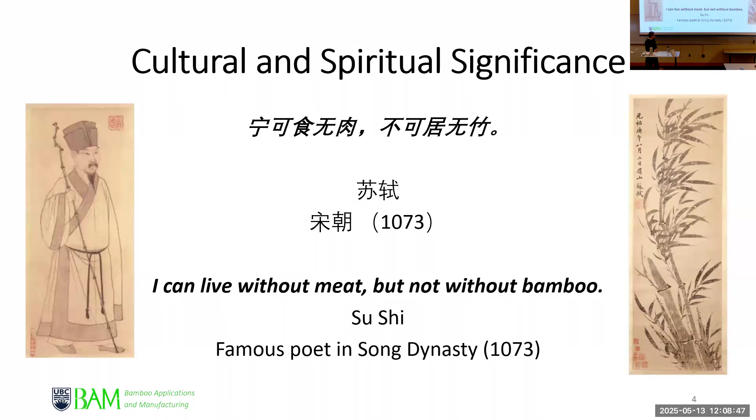What it says is: 宁可食无肉，不可居无竹 — 竹 is bamboo. If I translate directly, it says food can go without meat, but living cannot go on without bamboo. My poor translation is that what he's saying is, I can live without meat, but not without bamboo. That is kind of incredible. This is from a very famous poem by a famous scholar in Chinese history.

So obviously bamboo brings a lot of characters like strength, resilience, and persistence. And speaking of that, I'd like to bring the character of my group. I had the very fortune to bring together a group of young scientists and students over the last few years, and they made a lot of contribution to my research, particularly in the area of bamboo. So I want to thank them for that.

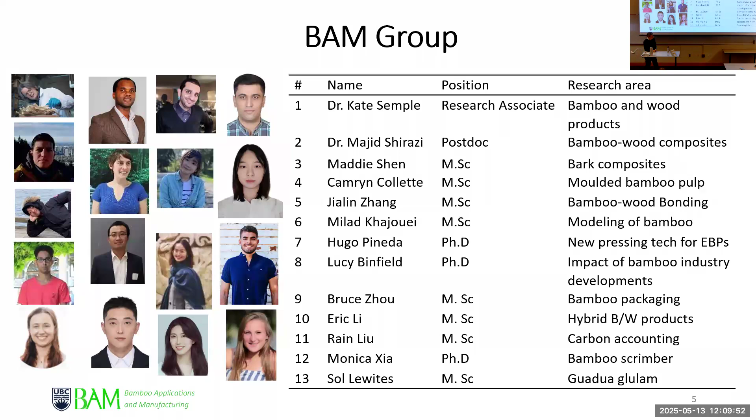So what I'm gonna talk about today is focus on bamboo and what makes bamboo so interesting and unique. Everybody knows about how fast growing bamboo is, and how does it compare with trees. Then some of the properties, carbon sequestration potentials, and also the material properties, because for us, we're most interested in using bamboo as a material. Then we're going to focus on some of the products that we've been looking at developing from bamboo, focusing on manufacturing technologies, which is kind of dear to my heart. Then looking at what might be the challenge ahead and the solution for bamboo development.

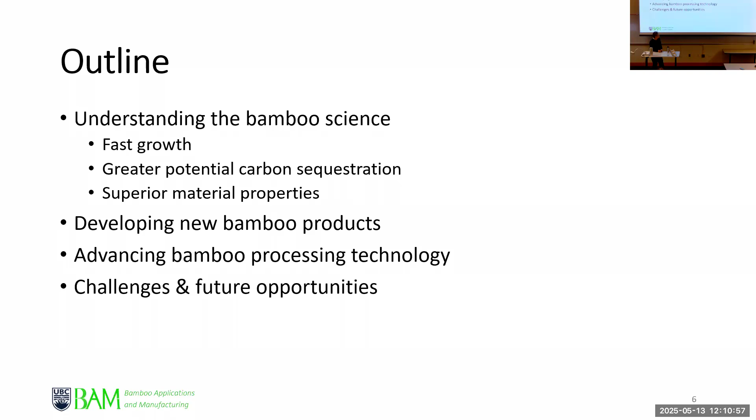So bamboo as a resource is mostly native to the southern part of the world, where the climate is more kind of warm and humid. There's over 1,300 species, might be closing to 1,400. Most of them are along the Asia Pacific, America, South America, Central America, and Africa. Now there's actually more interest in Europe and the United States growing bamboo already.

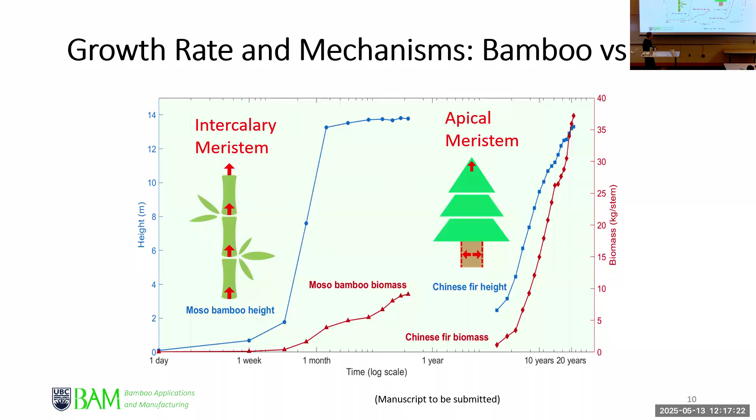When we compare biomass growth, the tonnage of biomass over a given area and over a year, bamboo is at the top. Following that is the southern yellow pine, very common in the southern US. Then you've got teak, a typical hardwood found in tropical areas, very dense. Teak density is actually equivalent to bamboo. Then there's Douglas fir, which grows so slow. That's part of the reason driving our industry to the south, because we can't compete with fast-growing species like southern yellow pine. I didn't even list eucalyptus, found in Brazil, which is even faster.

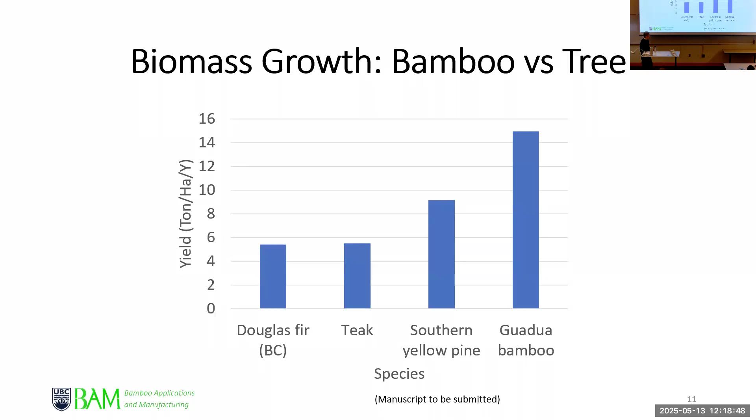So bamboo has the ability to grow both in height direction and also in biomass.

One of the things also about carbon capturing, again comparing bamboo with Chinese fir: you can see the fir's rotation is about 35 years. After that you cut it, and then grow the tree back again. This is a real study. Then you look at the carbon accumulation for bamboo, it just shoots up. Note we have these steps, each step represents 5 years of harvesting.

What's magic about bamboo is that when you harvest or cut it, the rhizome stays alive, it does not die. Whereas when we fell a tree, the roots start to erode, and you emit carbon dioxide right away. That's the main difference. Also the other difference is obviously how fast it grows, and the amount of underground biomass is substantial. Because bamboo does not die, the plant stays alive after cutting, this makes bamboo cumulative during the whole rotation or harvesting process.

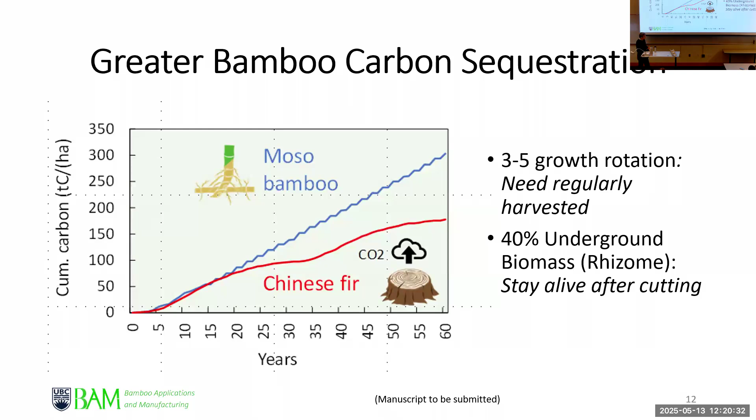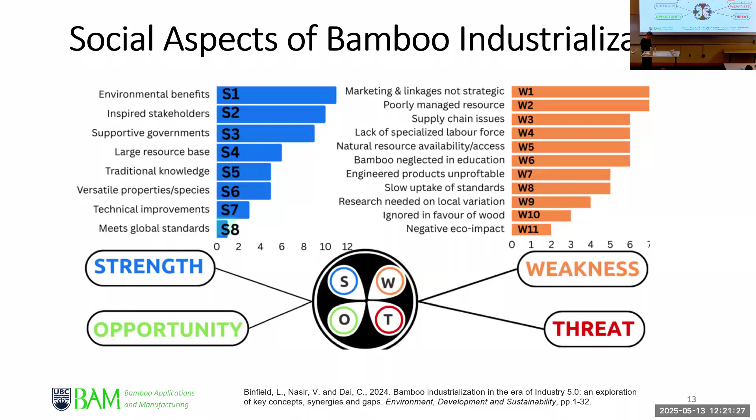Before I get into the material side, I want to mention we also do study in the area of environmental and societal impact. I have a student, Lucy Binfield, and we're looking beyond the technical material manufacturing side, but also social impact. She's in her 4th year and going to graduate. With that study she does a lot of interviews, talking to various people about the strengths, opportunities, weaknesses and threats of bamboo industrialization.

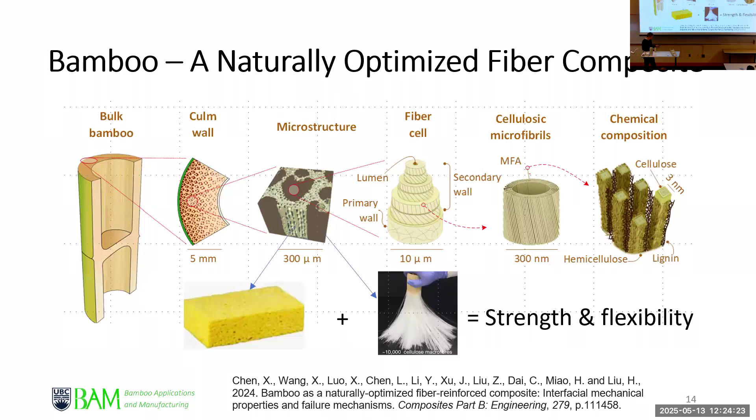When it comes to engineering properties and building applications, we're concerned most about the strength and then the elasticity. We do a simple bending test, applying load to see how much load it can uptake, and how soft and how rigid the material is in terms of elasticity.

That's because of the fiber, and how straight and continuous the fiber is. But on the other hand, the elasticity, which is also important for engineering applications, is actually relatively lower, which is interesting because for most engineering materials you usually have high strength and high elasticity together. But in bamboo, you have higher strength compared to wood, with relatively lower modulus of elasticity.

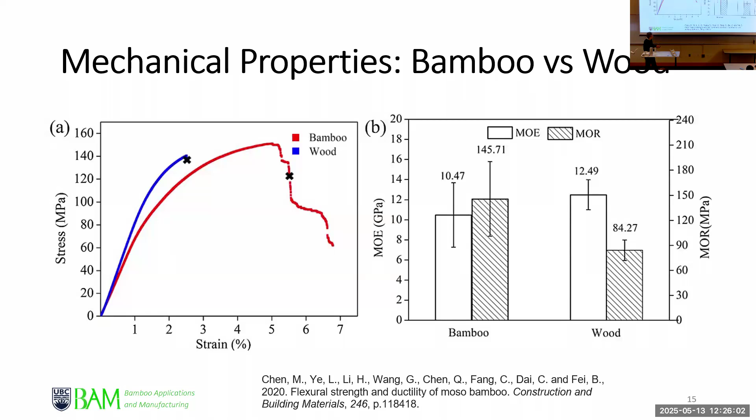Using that idea, I was fortunate to be involved in a development project where bamboo is used as the fiber, and the fiber is made into a curtain and rolled up into a pipe. That's because the bamboo fiber is so easy to roll and flexible, yet the bamboo fiber is much stronger, so that's a perfect application for a product like bamboo piping.

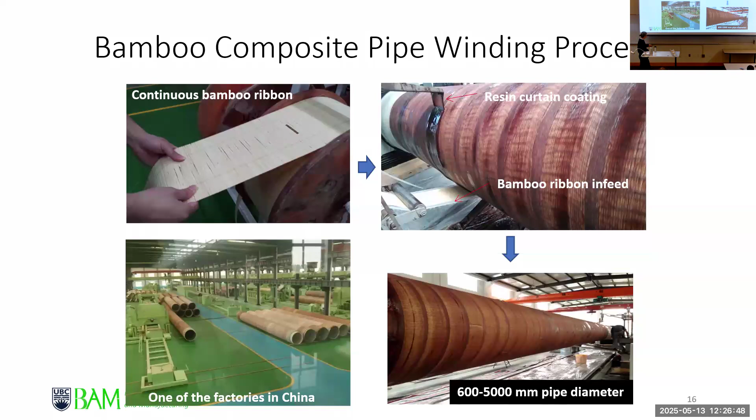This project has already gained commercial success in China, where it's used for sewage pipe, drinking water pipe, and even utility tunnels. As you know, utility tunnels can be very big, as big as 5 meters in diameter.

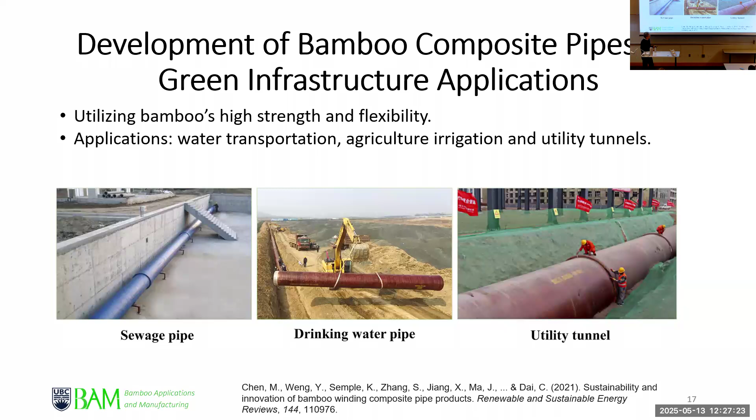So this is an example of how bamboo materials are being utilized to make more sustainable products for infrastructure applications. There's even an example of the bamboo pipe being modified into more of a square shape, which can be used as a unit to build houses. It can also be rolled in such a continuous fashion that it could be used to make bullet trains. Not commercialized yet, but nevertheless it's a great idea.

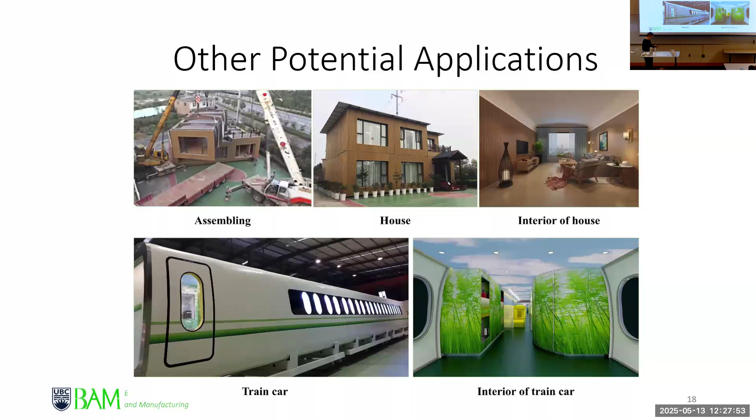Another product we've been involved in, going from the big end to the smaller end, is using bamboo fiber. Bamboo has, by the way, been used intensively in China for making pulp and paper. But there's growing interest in using bamboo fiber as a raw material to make boxes and food packaging to replace plastics. There's actually a big movement in China right now using bamboo as a substitute for plastics, and as you can imagine, there's great potential there.

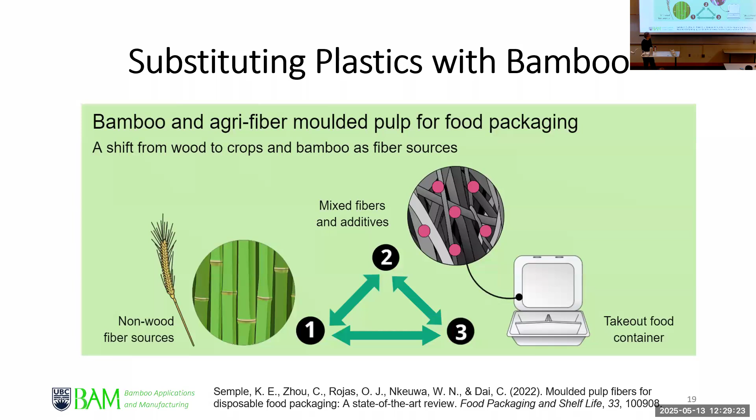The idea is simple. When it comes to takeout food packaging, you use it for like 30 minutes and throw it away, so you try to find the cheapest or most renewable fiber possible. The template is, instead of using wood, you use an annual waste fiber like grass or straw. But there's inherent deficiency in these fibers compared to bamboo, so bamboo becomes an enhancer for these materials, and of course you add some additives for performance.

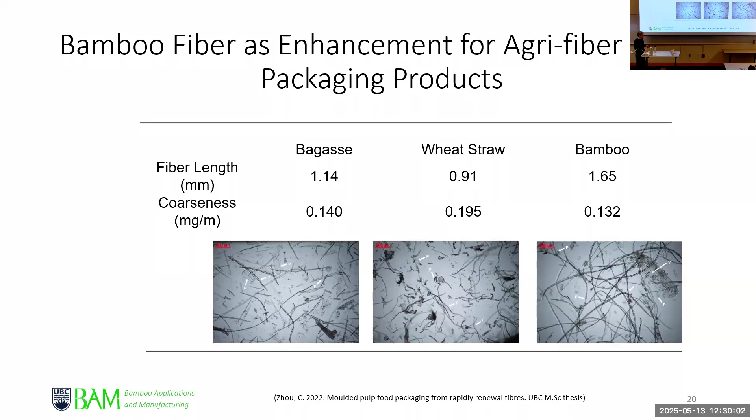You can see bamboo fiber is much longer and the coarseness is lower. Coarseness is the thickness of the cell wall, which is thinner. That thinner wall, when making these products, lets you easily collapse them and increase the bonding and performance. The longer fiber helps create more network and stress transfer for the performance of the product. So in both cases, bamboo has an advantage.

We've made progress not only in making the product and comparing it against existing products, but also in doing quite a bit of work on degradability and biodegradability. One key thing we try to address is the PFAS chemicals, or forever chemicals, used to prevent water and oil penetration. We've made a product without using those forever chemicals, and it performs really well.

That's actually Cam's project she could show off, but she's too shy, so you have to use the product to cover herself. Great job there, Cam, you did really well.

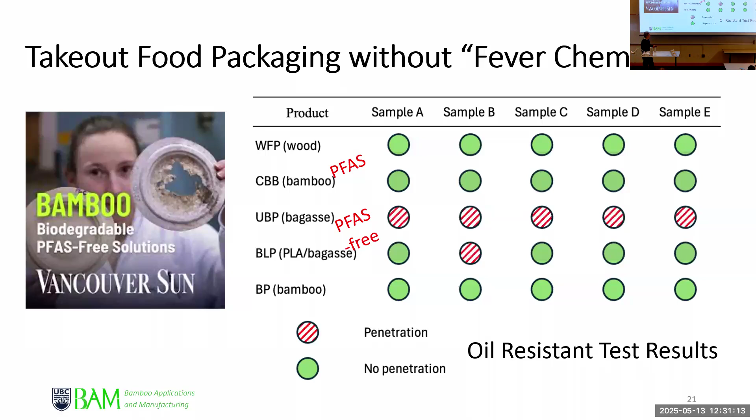The other kind of exploratory work we've been doing is trying to take advantage of bamboo as a unique fiber that has a very high surface area and a very high porosity compared to wood. The porosity is usually about 50% higher, and specific surface area could be 2 to 3 times higher than wood. So bamboo has known potential for purification applications.

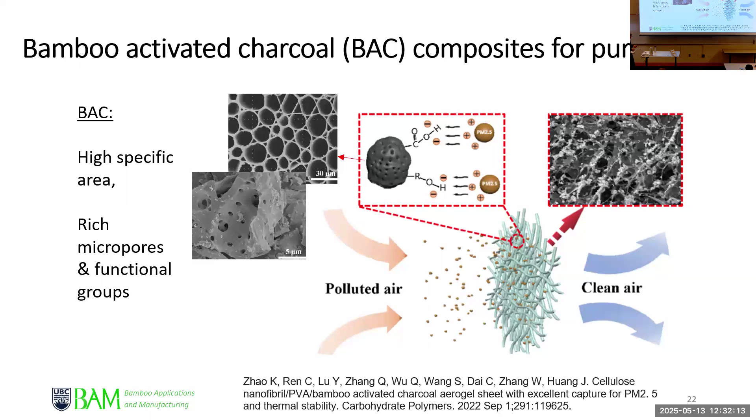In an age where we're talking about how to purify air or purify water, bamboo can play a major role there. We've done some work in collaboration with our colleagues at Zhejiang Agriculture and Forestry University, and they've made very good progress there.

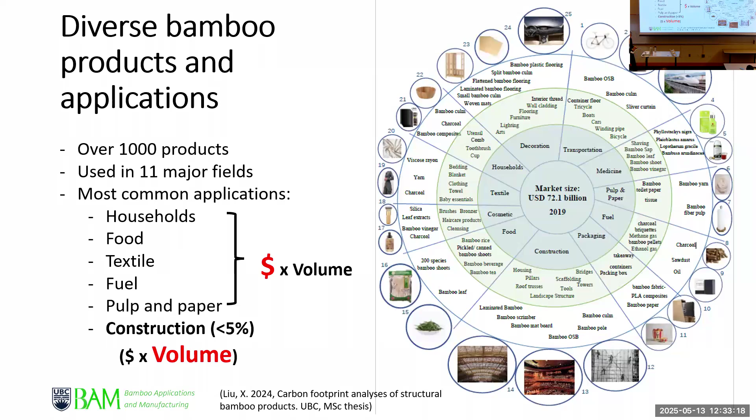Bamboo has this ability to be used as a material to make many products because of its unique structure and material properties. But for us in this part of the world, we're more accustomed to buildings and houses with big volume, and all the other applications are kind of small in quantity. Those other applications have higher unit price, more expensive, but if you look at building material, there's a huge market out there in terms of volume. So our focus has been trying to see how we can use bamboo as a building material, how it can be used as a complement for wood products.

We've been building our capacity here at UBC in the CAWP Centre, trying to develop a forming rig system where we can handle all the bamboo strips, apply load, and apply resin in a more semi-automatic or controlled way, then feed that into a press that we have at the CAWP. We can successfully make small billets like this and test them. One of my students, Saul Rodriguez, has made very big progress there.

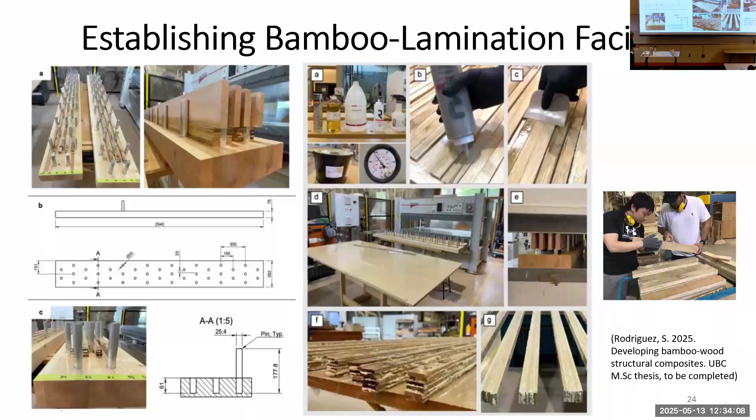Eric is another student who just finished his work, where we combine different processed bamboo with wood. The core here is just LSL, or equivalent to OSL, laminated strand lumber, and then we laminate it with different types of bamboo, and we can significantly upgrade the strength of the product. By the way, these are the local bamboo species that we harvest and made.

You may think this improvement is trivial, but it's not, because if you look at wood products, PSL is at the top of the range, and LSL, OSL - major producers can only make it to this level. So if you can just bring it up, that means huge market opportunities for them.

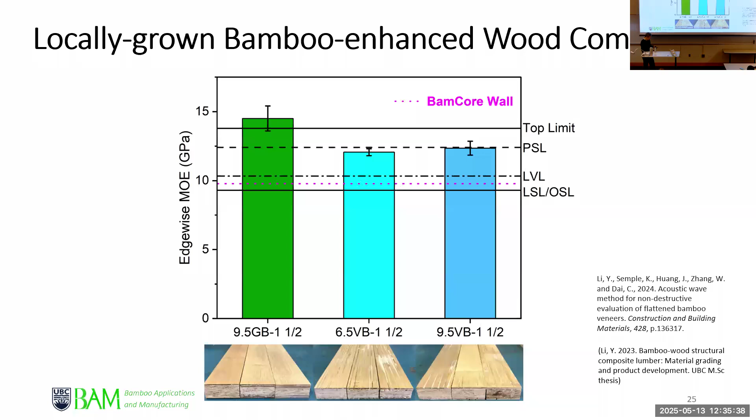BamCore is one of the companies in the US that has successfully used bamboo as a building material, so we compared against their product. We essentially developed a product that is cheaper and stronger, and can also help Canadian composite lumber producers meet their market requirements using locally grown bamboo.

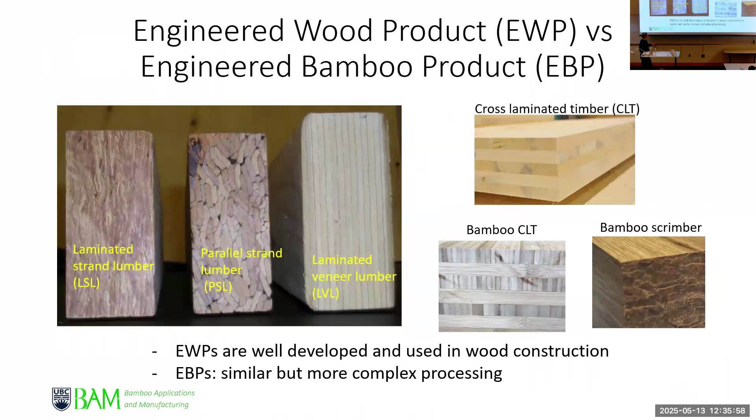So focusing a bit more, quickly, on unit bamboo products - bamboo can easily be used in a similar fashion, whether it's composite lumber or even mass timber. But the process of bamboo is quite complex, more complex than wood, because bamboo is a hollow structure. You have to deal with the hollowness, and also overcome the skin, which is generally a phase that resists bonding - the skin cannot be used for direct glue application.

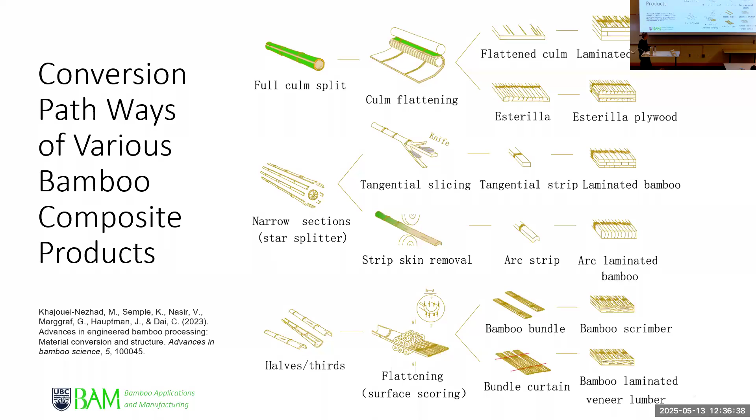So there's definitely various ways of removing the skin or modifying it, while also trying to control the geometry of the element and maximize recovery. It basically boils down to 4 types of products. The laminated type is common and has the lowest density, but the recovery is low, because you've got to get the square out of a round shape.

Then you start to look at actually unfolding bamboo - I'm holding a piece of bamboo here. What they're actually doing is trying to unfold this and make it flat, like a veneer. That way it can significantly improve the recovery. And further, if you scrim them and keep the skin, your recovery and utilization can increase.

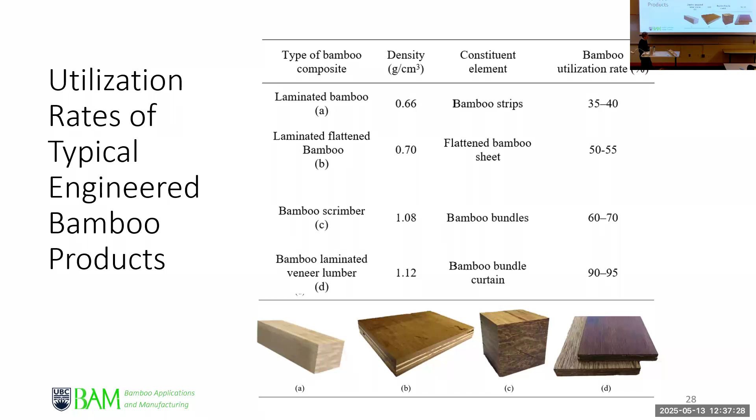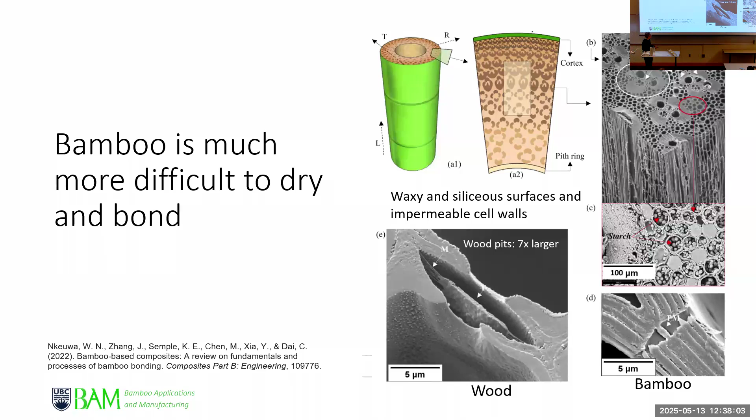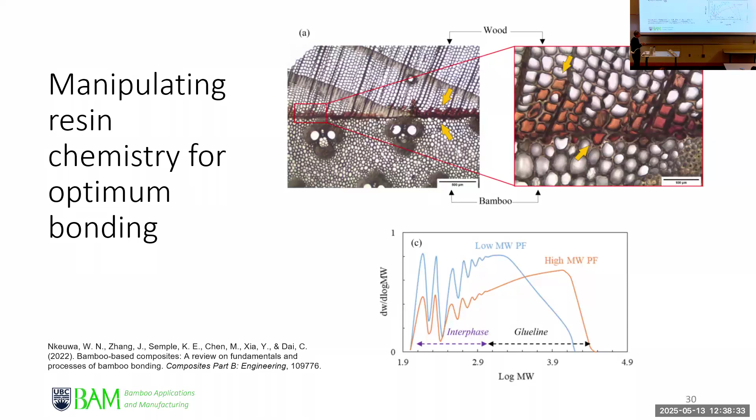And also difficult in terms of glue penetration. You can see from this example, on top is the wood, the bottom is bamboo. The same PF glue applied, you can see how glue can easily migrate from the surface interface to the inner cell, whereas almost nothing can go through bamboo.

So there's a real requirement in terms of the treatment of bamboo and how the glue is applied. We've worked on this and proposed a new method where we apply two different glues to the bamboo and to wood separately. Therefore, when it comes together, we can actually maximize or improve the bond. This is what we call a dual glue application system.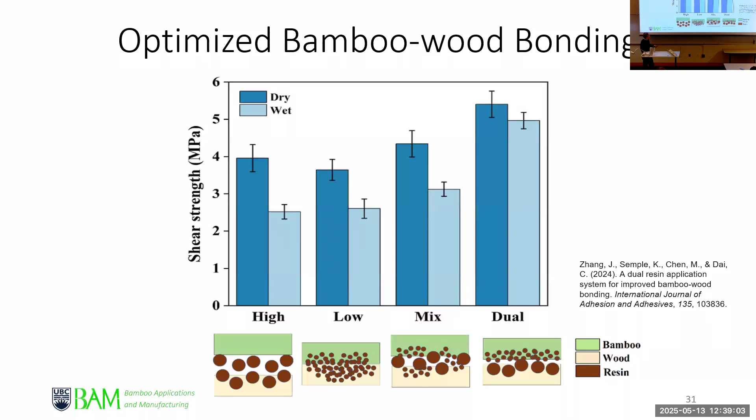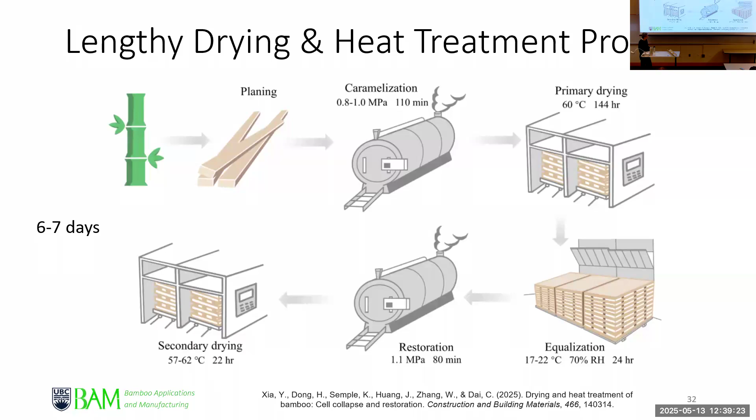The other hurdle with bamboo is the drying. Like I said, because of the low permeability, it takes much longer to dry. It's hard to believe that simple strips like bamboo take even longer to dry than a 2x4. Seven days. So one of the reasons Monica did the study is that it's again to do with the low permeability.

But also the soft tissues - remember the sponge? It tends to actually collapse when you dry. Mind you, during drying we also have to go through a carbonization or caramelization process. The bamboo tissue is heat treated to make it more mold resistant. Mold is common in bamboo because it contains starch, like you see here. And then that has to be treated or removed and heat treated, along with drying.

So at some stage during the drying, the primary drying stage, the water is removed and you create a vacuum basically because it's so small. The vacuum pressure is too high for the cell to hold and the cells start to collapse. And then you've got to go through a secondary steaming process to recover the cells.

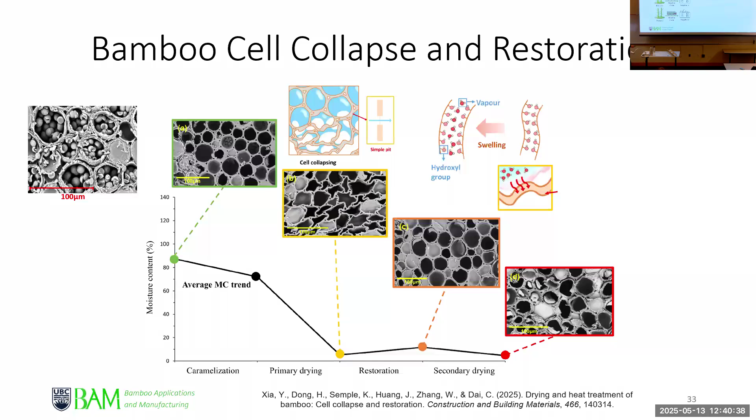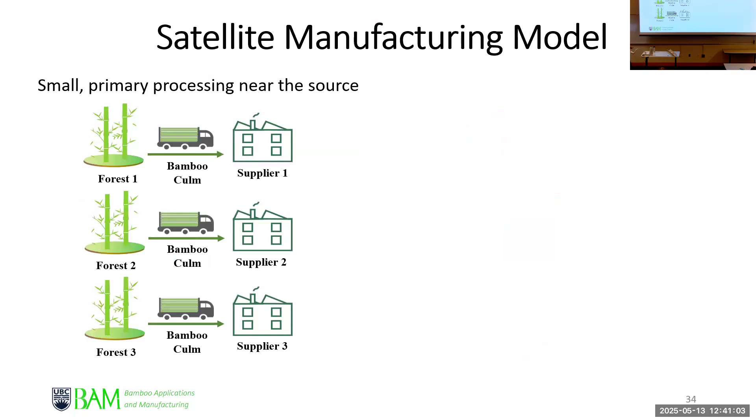And because of the mold issues, most bamboo processing has to be built up in terms of what we call a kind of satellite manufacturing model, where the bamboo has to be harvested and processed right away. The primary process allows bamboo to be dried to get into a more handleable form, and then the semi-processed bamboo lamina can be sent to larger mills for processing.

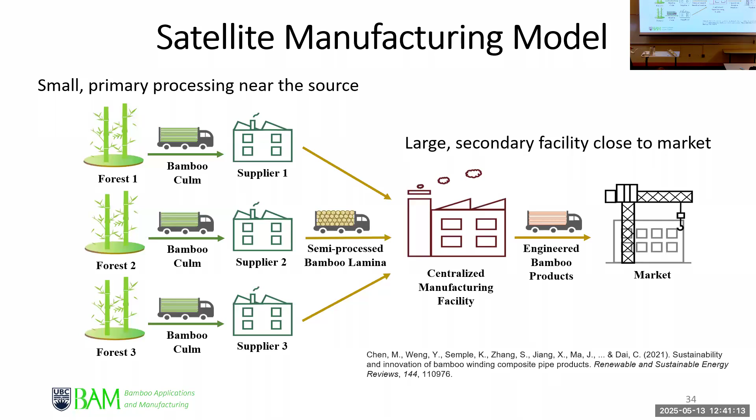And looking at engineered bamboo, really, if you look at the strips, it's pretty much similar to what we see in Parallam manufacturing process. But the process is so manual, you can see that the operator is there kind of hand forming them. And there's a lot of variation.

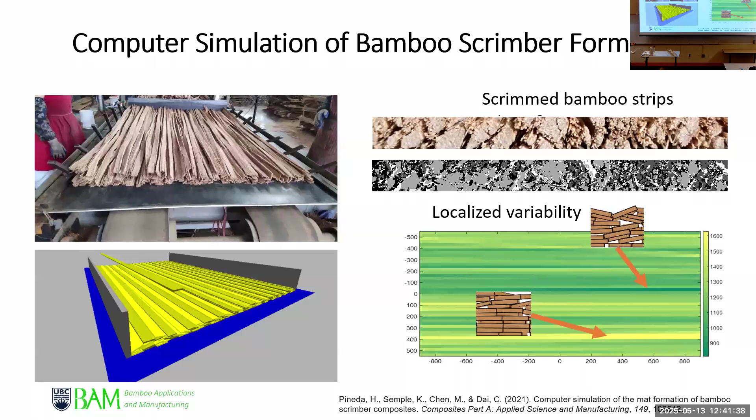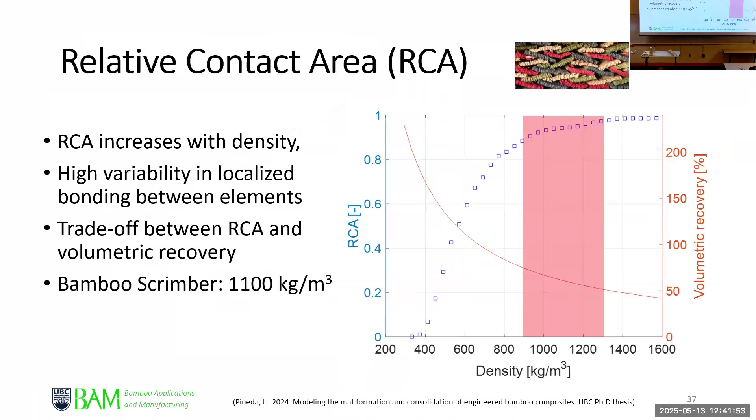Hector did a PhD to simulate this and found there's a lot of variation. And he kind of predicted how one should densify the product to achieve the optimal performance while getting the maximum volumetric yield. So with that, we're proposing more of a layered system instead of a random material structure to allow maximum recovery and optimal performance.

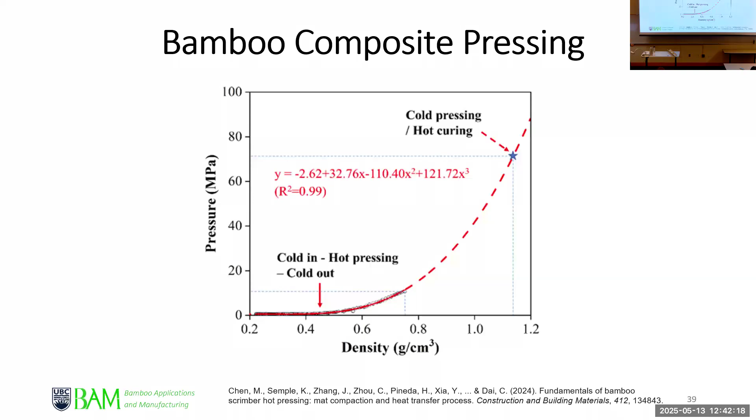On the pressing side - this will last a bit. So when it comes to manufacturing engineered bamboo product, pressing is critical because bamboo is so hard. It requires a lot of pressure.

In the first version of bamboo scrimber, the hard bamboo floor that you see, they actually made it with very little size - you can see the size is very narrow, although it's a bit long. But because the pressure required is so high, there's a second generation of manufacturing process where heat is introduced. That allows you to make a more panelized product, with heat helping with the consolidation.

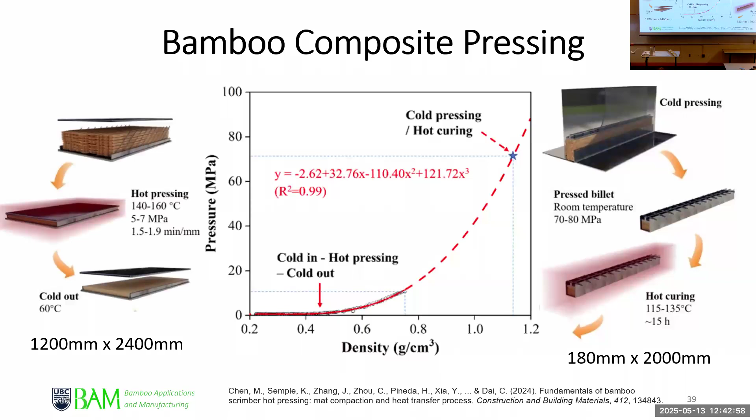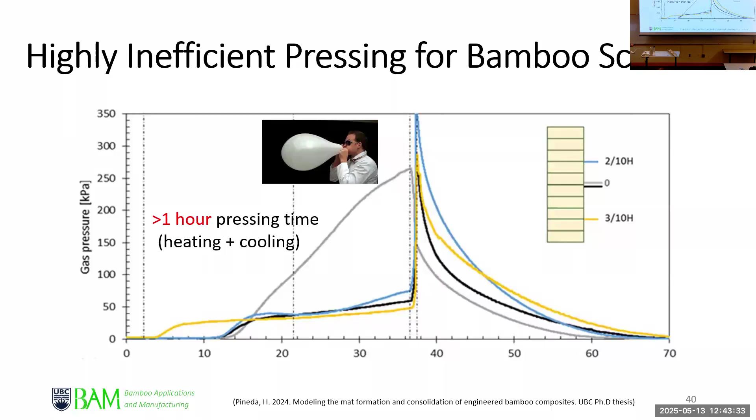And in that process, the hot pressing is a real problem because it takes so long. This is looking at the pressure, how the gas pressure builds up inside the product, and you have to release that pressure before you open it. Otherwise, you're going to have blow or delamination. So that process takes over an hour, which is really a problem in terms of limitation and cost.

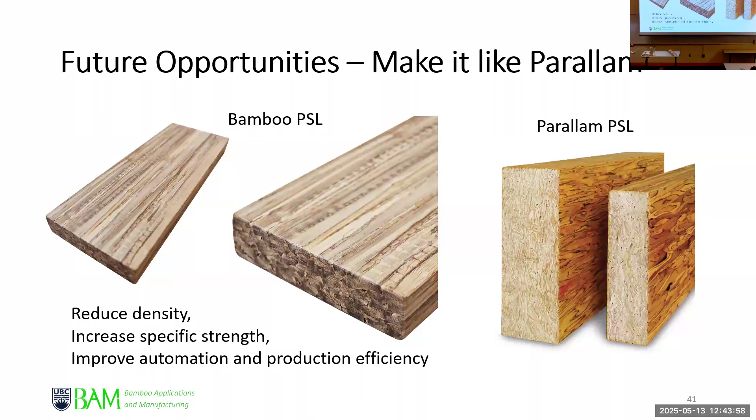So what we're looking at in the future, we believe bamboo can make a huge stride in terms of production efficiency and performance by adopting the Parallam model, where density is lower, therefore permeability is higher, and the forming is going to be more automated instead of manual.

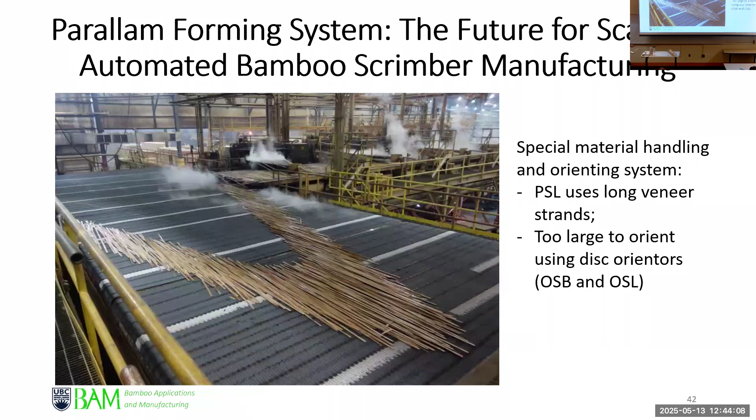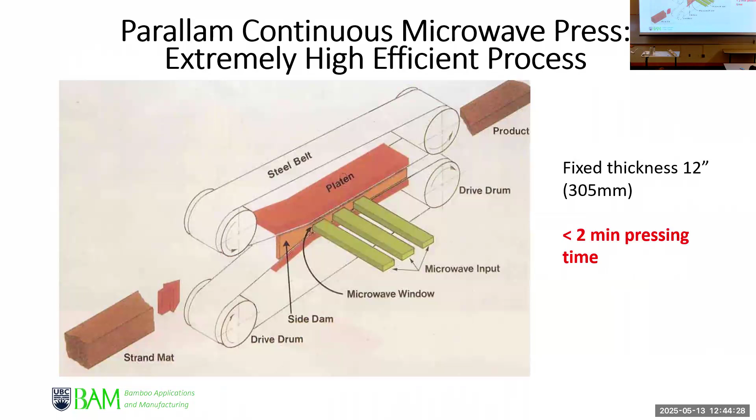And most of all is the pressing. Like you see how fast the Parallam is pressed - it's mind-boggling, within 2 minutes compared to an hour or more than an hour, right? So there's a huge opportunity there for bamboo to benefit by developing that technology.

And also, another way to improve the automation and manufacturing process is by looking at the OSB example, because then you can strand bamboo with the skin on.

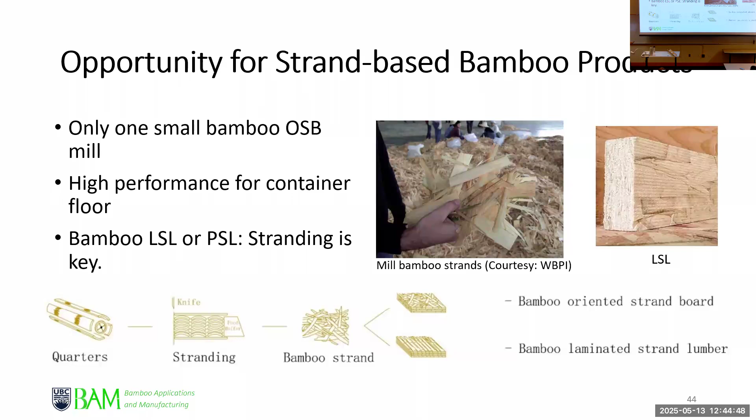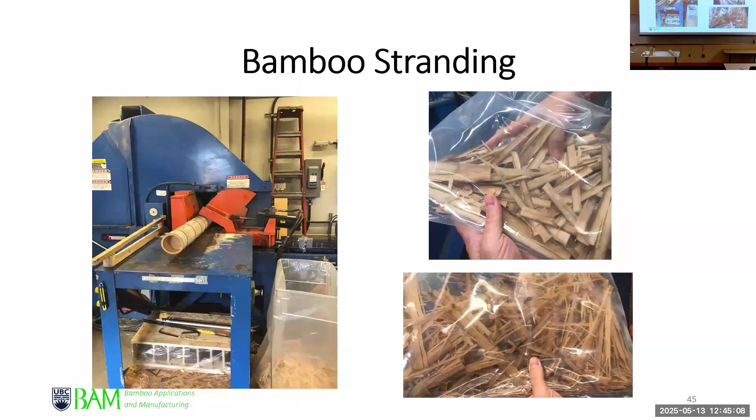I'm looking at the time, so with that, I'm going to stop here by saying that bamboo is really a wonder plant that presents a lot of positive attributes and economical, social, environmental benefit to mankind. However, there's a lot of work to be done to actually realize that. Thank you for your attention, and thanks also to our sponsors. If you have any questions.